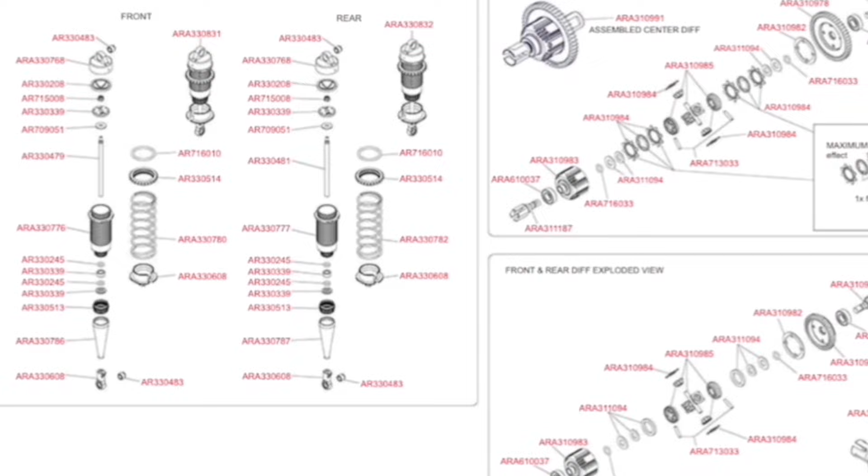About a year or a year and a half ago, Arrma came out with their EXB variants for their rigs, and these differentials had slip plates inside of them. I'll go into the details about the slip plates. But ultimately, in their latest rigs, the Extreme Kraton or the 6S Big Rock, they still use the EXB differentials. The only difference is they've removed the slip plates from the rear and front differentials, and came out with a kit. The center differential still uses the exact same center differential that you got with your EXB.

So this video is going to do a couple things for different people. If you're brand new to the hobby, this will be your first deep dive into understanding the differentials that came with your Kraton EXB Extreme or your 6S Big Rock - taking them apart and reinstalling them, I'll show you all of that. However, if you've got a V3, V4, or even a V5 and you're looking to upgrade to the best setup Arrma offers, the only thing my V4 hasn't done yet is switch my differentials to the new EXB variants. So that's what I'm doing today. Strap in, here we go.

What's going on everybody? This is the Arrma V4 Kraton 6S. I don't know if you remember from my last bash session, but I was actually experiencing some clicking in the rear differential.

I'm actually going to upgrade to an Arrma Kraton EXB diff. So I jumped onto Jenny RC's and picked up an entire diff housing. In my V4, the only differential that's going to be the EXB version is going to be my rear. The gear setup on the EXB differentials is not only tankier, the spiral cut is slightly different, so you need to make sure you swap out to the proper EXB spiral input gear.

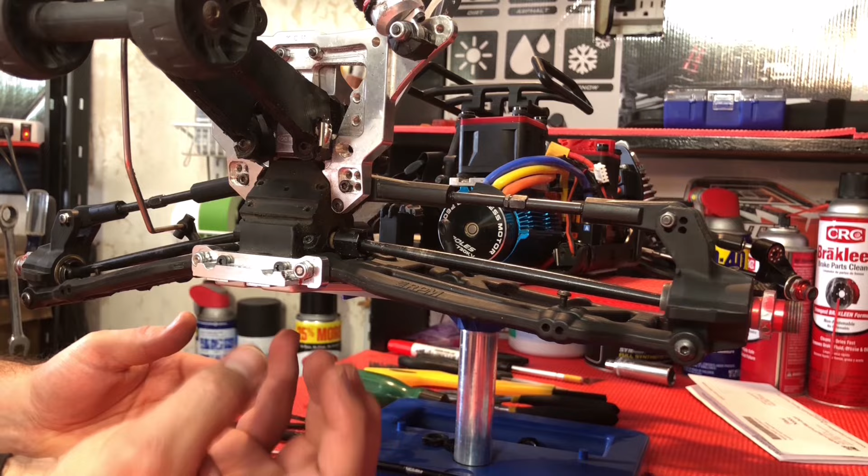Now that's removed, I went in and removed the four screws holding on my rear skid plate, popped out the pins for the shocks, folded those up, and I have these all tucked away with this rubber band. Pop this off and we can work directly with it here.

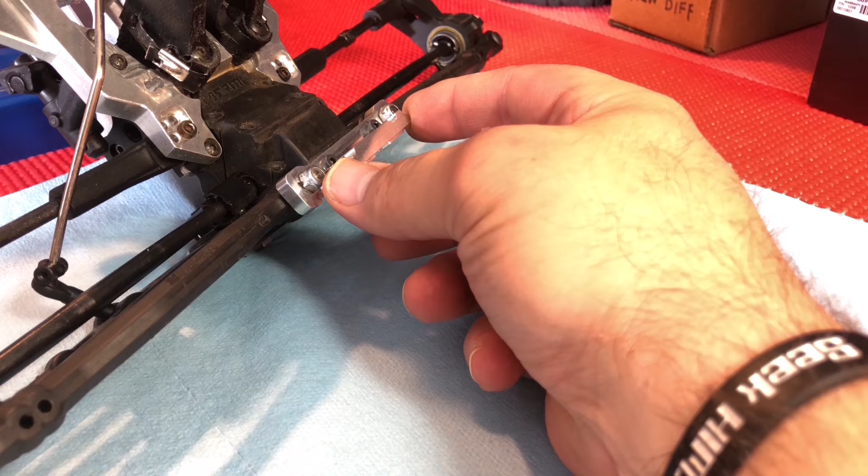You'll notice this is a beefier hinge kit than what you would normally see from M2C, and that's because I've incorporated a unique rear bumper, which is right here. This is actually the Mojave rear bumper. In my opinion, it's one of the best rear bumpers you can get for your Kraton and many of the other Arrma rigs. Highly recommend watching this video if you haven't checked it out yet.

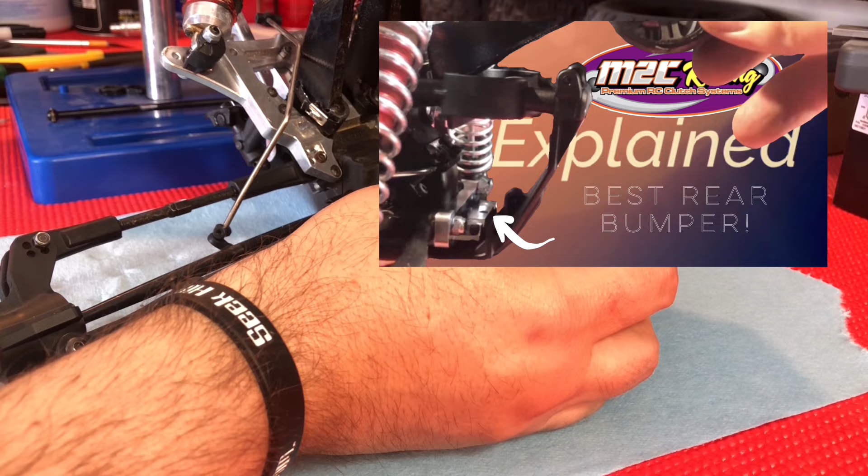There we go. You're going to want to make sure you put these shims back on with the new setup.

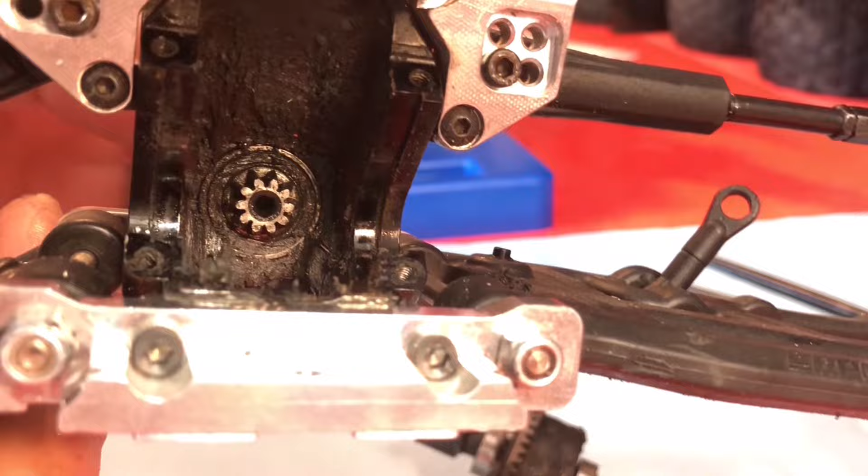Now to determine where the actual clicking came from, we could take a close look at the spiral input gear. It looks fine, but you see those two are really bad - the tips are gone off of that one, and that one, and that one. So that's probably where my skipping was happening.

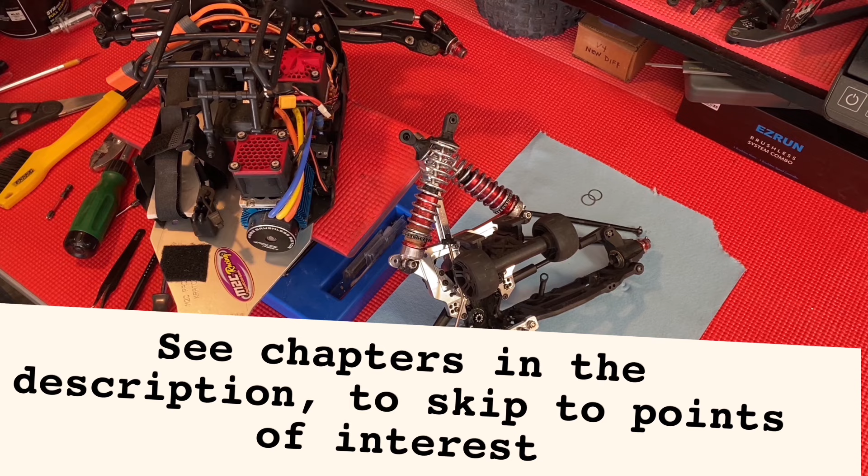We'll take a close look too at the difference between the V4 versus the EXB. Let's go ahead and set these aside for now, because we want to remove this M2C outdrive cup that's connected to the spiral input gear.

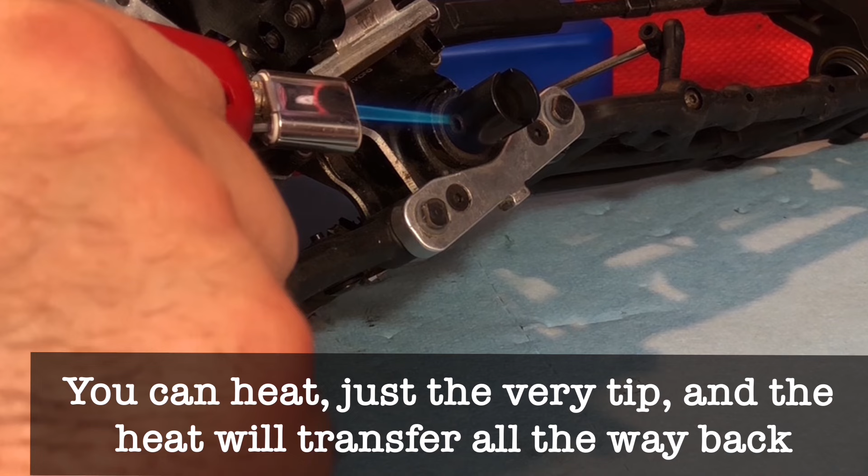Red Loctite was incorporated. Now if you have a composite bulkhead, throwing a flame at this might make you a little hesitant because you don't want to melt the bulkhead. I don't really have anything to worry about because I've got an aluminum bulkhead. Oh yeah, that's toasty. Super easy with a little bit of heat.

Now while I was cleaning this out, I found a shim that I put on the back side of this right here. Let's go ahead and get the EXB differential out.

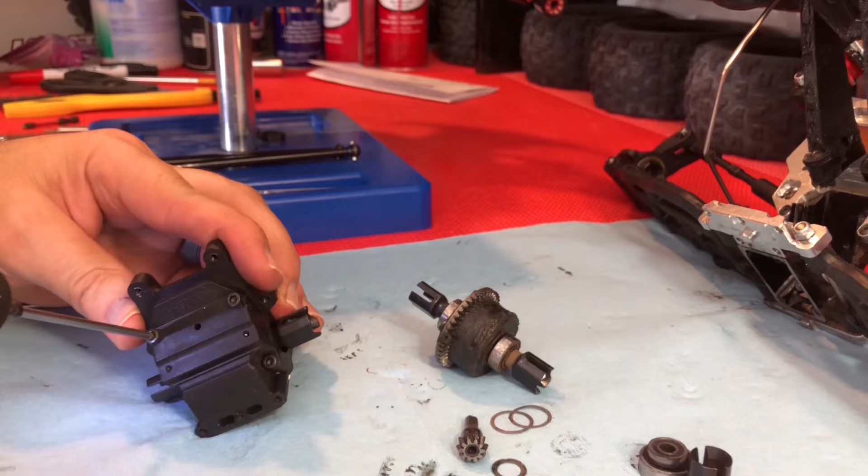From the factory, it comes with one shim. All right, so let's take a close look at the differences between the EXB rear diff and the V4.

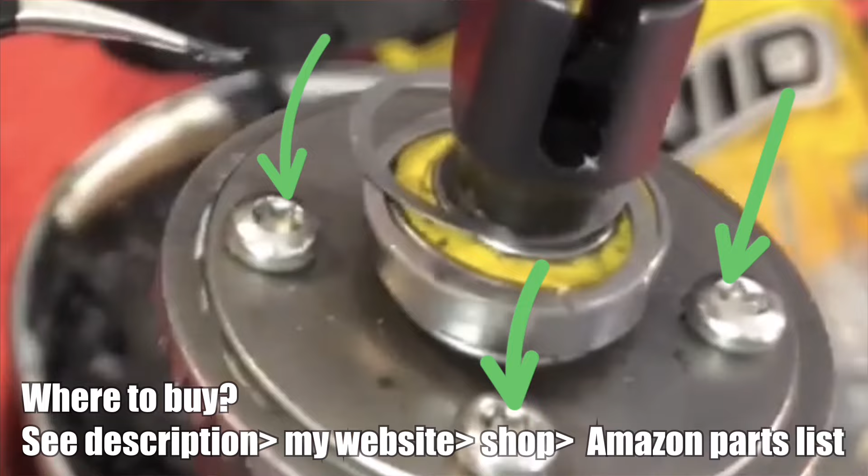First thing you notice is the V4 has screw-in bolts that protrude. I replaced all 4 of these with Torx heads because they were stripping all the time, driving me crazy. With the EXB, it looks like it uses the same size hex head, so hopefully those don't strip out too easily, but they are now flush, which is cool.

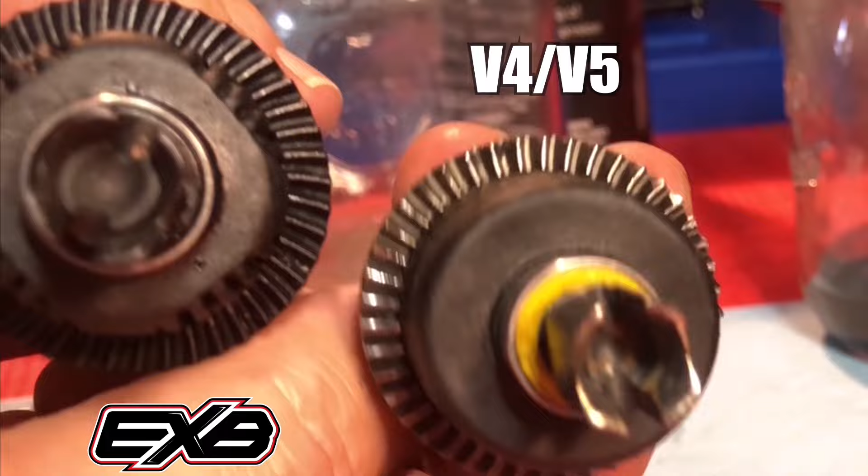The cup itself actually looks slightly smaller with the EXB, which is interesting. You can see that the teeth are actually longer by about 2 millimeters. You can also see a curvature to the EXB teeth, whereas the V4 variants are more straight. Looking at them from the side, the teeth on the EXB are a little bit meatier. They don't quite have such a fine tip, which lends to their more robust nature.

Also, you can see that the metal is different. This metal is actually a higher quality metal than the V4. You can see the mill lines in the EXB, which is another sign that this is a higher quality metal. And you can also tell they're just slightly taller.

All right, let's get these both taken apart and dropped into their jars.

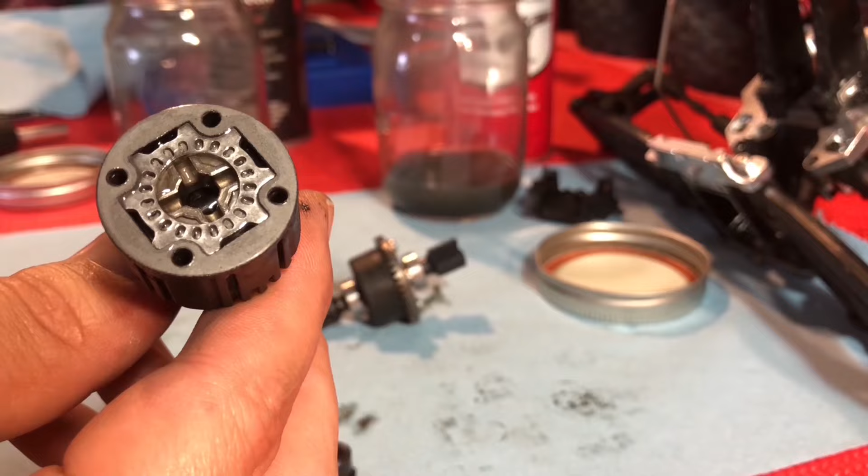Now, I believe when I picked this up, I bought the open differential, which, my first clue is that it's not, because I can see the slip plate on top. Let's get it open. The first thing we have is the gasket, which we want to be very careful not to damage, and I don't think I'm going to put the gasket into the solution.

Okay, we have 2 separate slip gears. If you look really closely at these, you can tell one side has a flat face and the other has a round edge. The rounded edge goes face down on the sun gear.

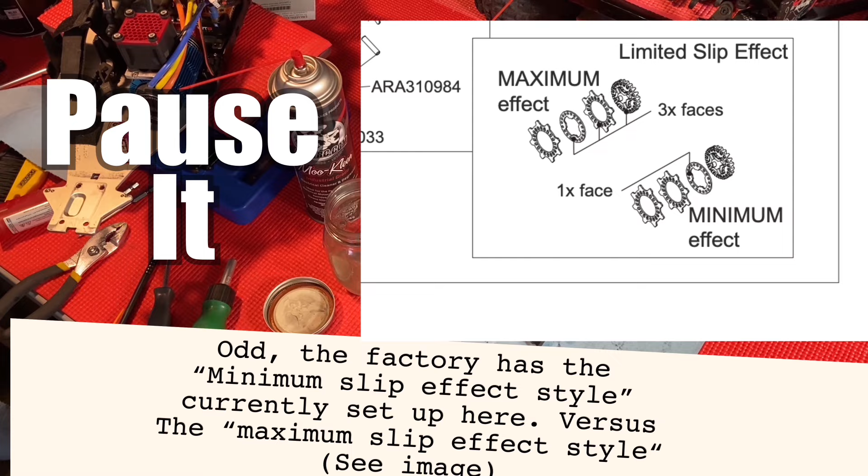Okay, now let's drop both of these into the solution. This is one of the main features that's better - that pin is way beefier in the EXB.

And that's pretty much everything. Pull this out. And then we've got our grommet. Now the grommet I'm not going to put in here because you don't want to do anything to deteriorate it or change its rubber quality, so we'll just dry that off.

Let's go ahead and remove this thing. Look at that, see how that looks? Pretty cool, we'll keep those into the new setup. They don't need to be put in there either.

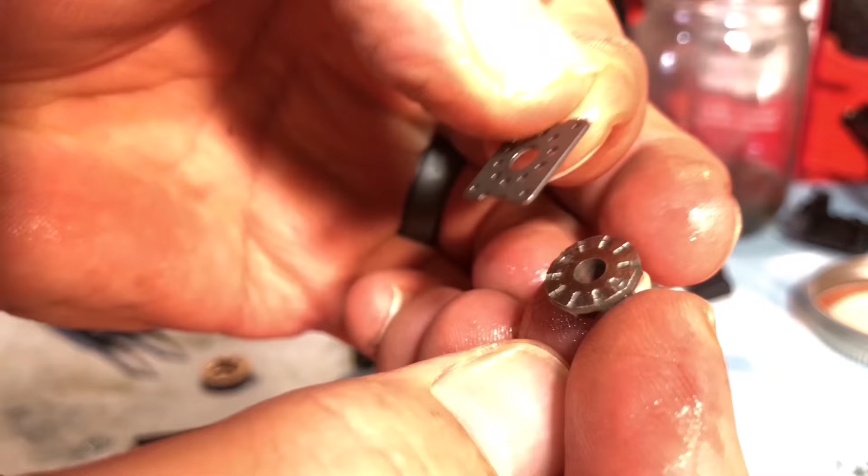All right, continuing on. The rounded edge goes up against the spider gear. We already know about this, so we can go ahead and separate everything out.

All right, let's see if we can't get this one out now. Sometimes getting a pair of needle nose pliers like these is easier. There we go, that in. And then just like the last one - oh, wait a second, this time it's in between them.

It went in this order and this facing. Let's go ahead and get the pin out. In order to get that out, we have to actually pop off the grub screw there. Set that aside, we can line that up and get that pin out.

When pulling this out, I didn't notice any washers or anything like that on either side. Now as far as on the inside goes, we have a big washer, a little washer, and our O-ring. I just want to point out, as far as the sun gear goes, that is way meatier - the teeth are larger, it's just tankier in all aspects.

Okay, so now let it also be noted that this is not an open diff. With the slip plates, it's got the slip plates. Without the slip plates, it's an open differential. You can actually incorporate some spacers instead of these plates so that you have an open diff.

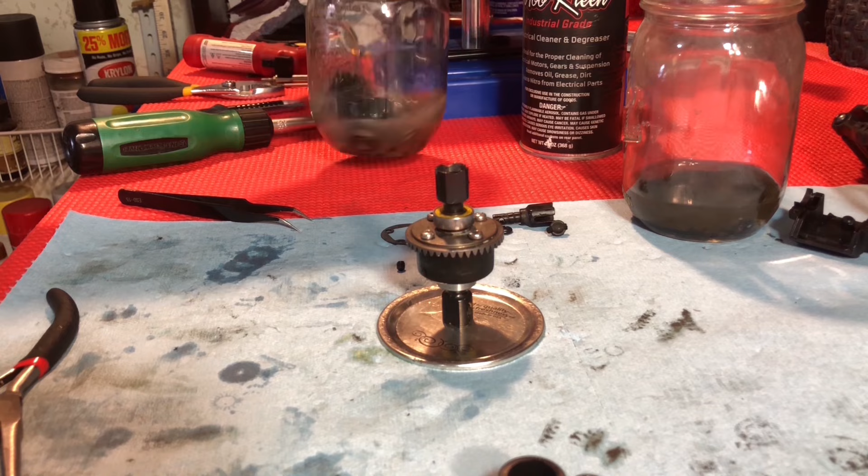Now let's take apart the V4 and put it in this jar. Try to hurry. Pretty goopy. All right, I am back and I finished cleaning up the V4 differential.

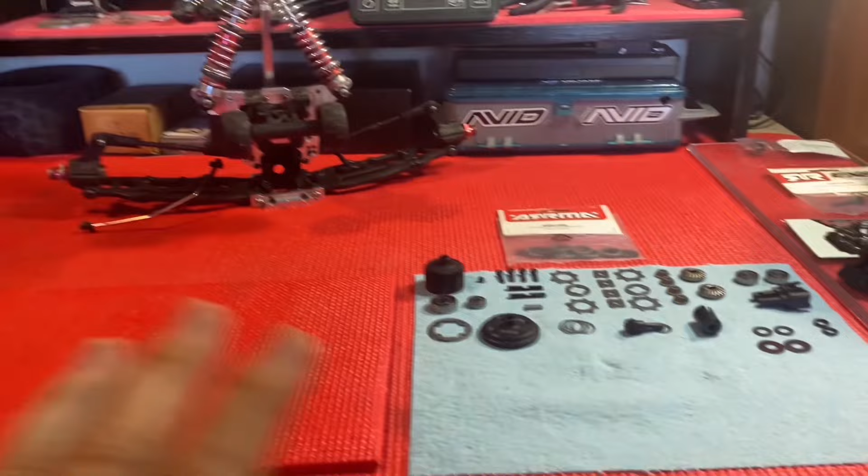I wanted to get into a little bit of detail about the value of switching the rear end over to the EXB differential. I've had the most problems with the rear end. Over time, if I strip something in the center, I'll switch it to an EXB differential. Same with the front. I love what I see when it comes to the EXB. That's what I'm showcasing today.

Before I jump into the installation and reassembly of the EXB differential, I wanted to talk about the new gears. They're beefier, tankier, made of a better metal. Arrma also incorporated this limited slip technology. I'd like to talk about that.

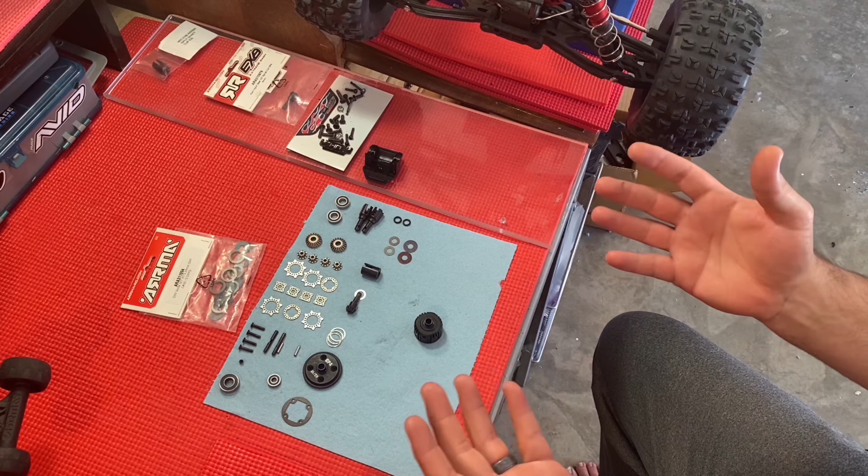You're going to find limited slip disc technology in your cars, larger trucks, real world situations, because there's an interesting thing that happens both at large and small scale that needs to be accommodated for. When you're ripping around on a track and this tire is on really solid road pavement with a ton of grip, while this side is on a slippery surface like sand, water, or oil, when you gun it, the side without traction ends up spinning way faster and getting way more power. You won't get as even power to grind out a fast rip. So what happens with a limited slip differential is it allows power to still be sent to the other side, not all of it driven to one side or the other. It basically gives that side back more power for more even traction to the rig.

So with that mentality, you'd think a limited slip differential would be better for all circumstances, right? Well, it's sort of hit or miss when it comes to RC cars. In real world, large scale vehicles, it's actually really important, especially in large scale off-roading, or even just vehicles trying to maintain the right traction and friction for driving on a road or icy road. You might see videos of somebody in a car where one tire is completely stuck and the other is just spinning, so they're stuck and can't move. If the stuck tire was getting more power sent to it based on a limited slip differential, it would be more likely to get out of its situation.

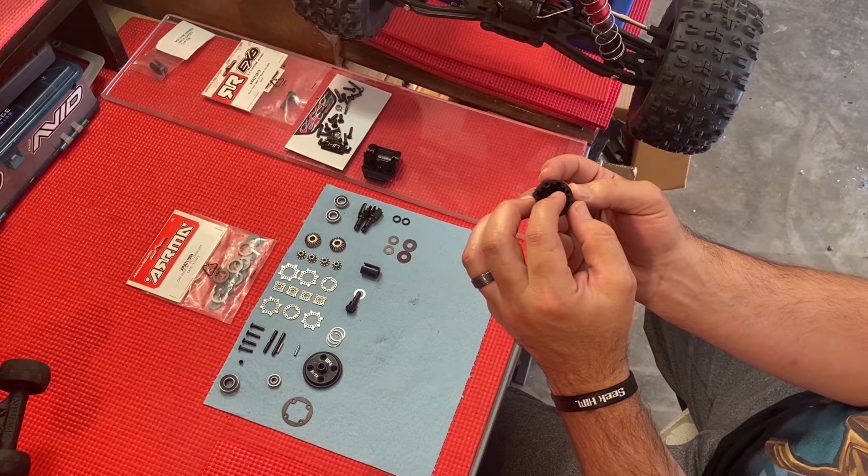Inside the cup of a large scale vehicle, the technology is actually different from how Arrma incorporates their limited slip action. Let's assume this is the inside of a differential for a 4x4 truck. They have a spring that sits between the spider gears, pushing outward and giving consistent pressure. Then they have slip plates inside on both sides with the planetary gears, and the pressure of that spring pushes and creates pressure. It squeezes the discs together, they lock in, and it provides power to the side that's spinning too fast. So it uses a pressure system for the technology.

Arrma didn't put any sort of spring in here to provide the same type of technology. Instead, they incorporated little holes into the actual slip discs that create more drag. So it actually uses the differential fluid as part of its technology to run. The downside or drawback to this is that when you're using the diff fluid itself as a component for engaging the slip plates, for traction to be sent more to one side or the other, you're using a component that already exists.

So many people in the RC industry have found that whenever running limited slip differentials, it just feels way different. That's the simplest way to put it. And there's less consistency with the performance when turning and doing different things. It's not necessarily a bad thing, it still works to some degree, it just doesn't work as well.

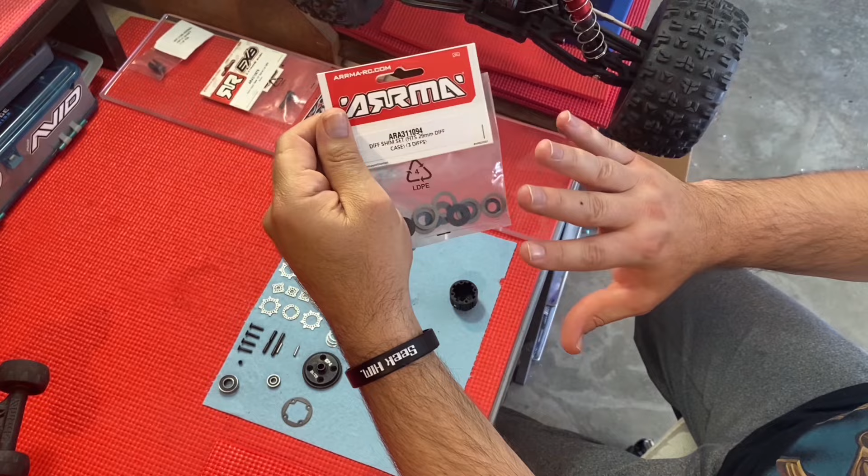There was a lot of hangups in the beginning when Arrma came out with this rear differential slip disc stuff. You don't want to just throw together your own shims, which a lot of people were doing, and then they were having problems. Arrma finally came out with a shim kit that is the exact thickness, addressing the issues they were having from the beginning with the EXB. I'll probably still open these up and mess around with the oils. At the end of the day, I might even make all three differentials open because I'm just not digging the way it's cornering or the way it feels.

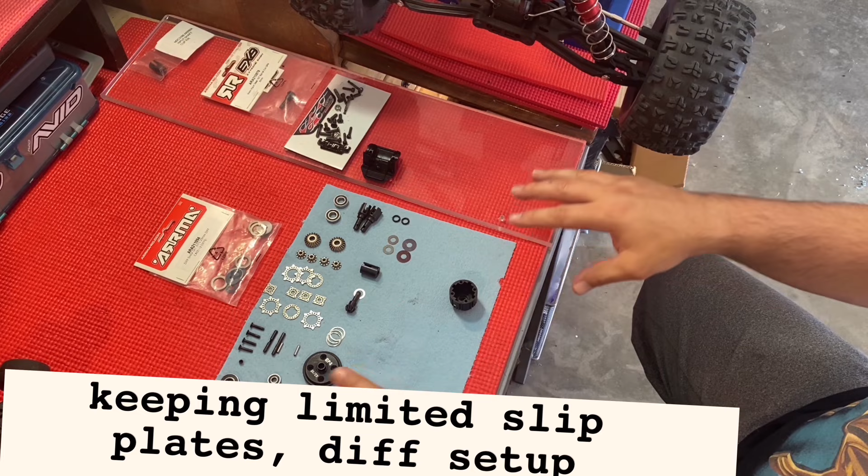So with all that said, let's get into the weeds and show exactly how to put this thing back together. I'm going to throw this together in a dry fashion so you can see exactly how to reassemble this if you're incorporating the slip plates.

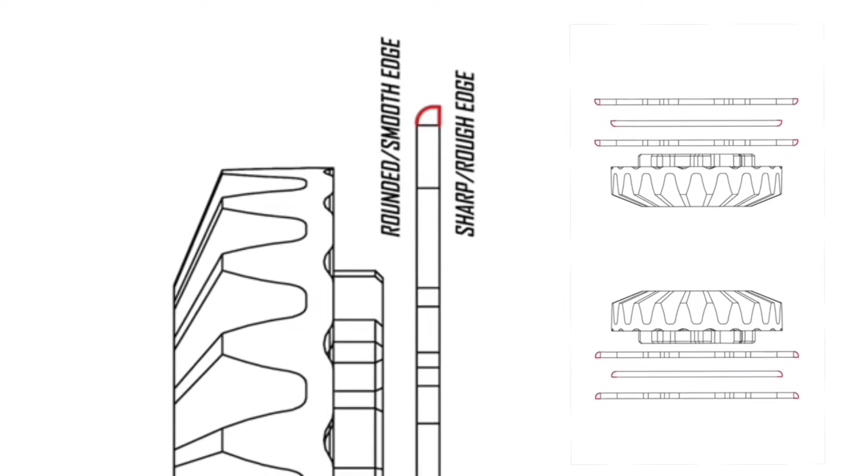There are two ways to load the slip plates. This fashion incorporates less slip than if you were to put this down first: the star gear, then the circular gear, then another star gear like this. Remember, the rounded edge faces toward the sun gear.

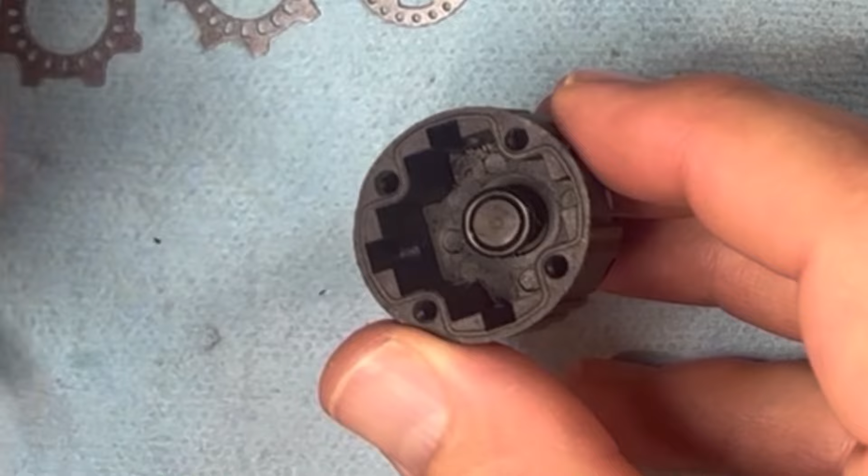So let's set this up with the slip plates. First you grab one of the outdrive cups and the bearing, pop the bearing on, push this up through. Again, I'm doing this dry. We take an O-ring and gently push it down into position. Normally I'd put some of Cow RC's Udder Butter here, but for now I'll just set this aside since it's a dry run.

Then the larger of the two shims, then the smaller. Then we slide in our pin, drop this in. Before the sun gear, we're going with maximum slip, which means I'll put this in first, rounded edge up. And we'll go with this rounded edge up again.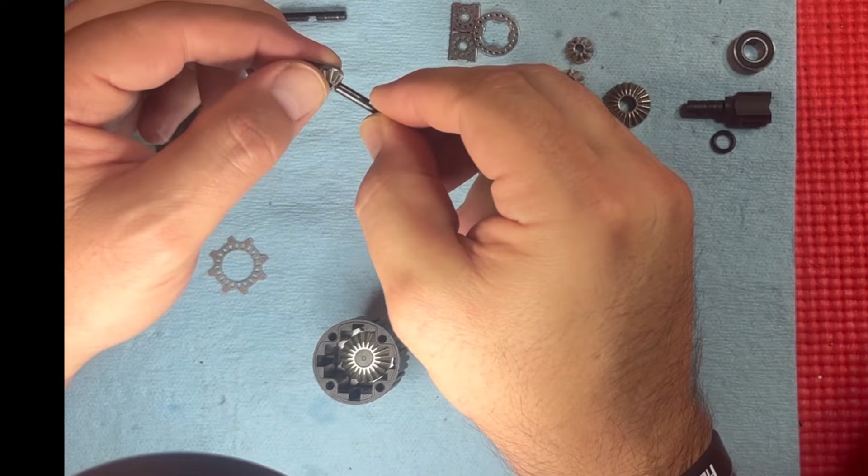Now our sun gear drops in. Next we assemble the spider gears with the shafts. The rounded edge touches the face of these spider gears. I need to rotate it so the notch is at the top facing upward. Now we assemble this one, rounded edge in. Everything should rotate, okay.

Now again, we're doing maximum slip: sun gear, then rounded edge down on the first one, rounded edge down on this, rounded edge down here. Now that this is assembled all the way dry, you'll notice it sits perfectly flush with the top.

The reason I wanted to do this dry is to show you how the slip plates interact with the differential fluid. If you look closely, you can see the holes. When you have a large star plate, then the small circular plate, then the large star plate, with interaction between all three of those holes, you get the most resistance from the oil.

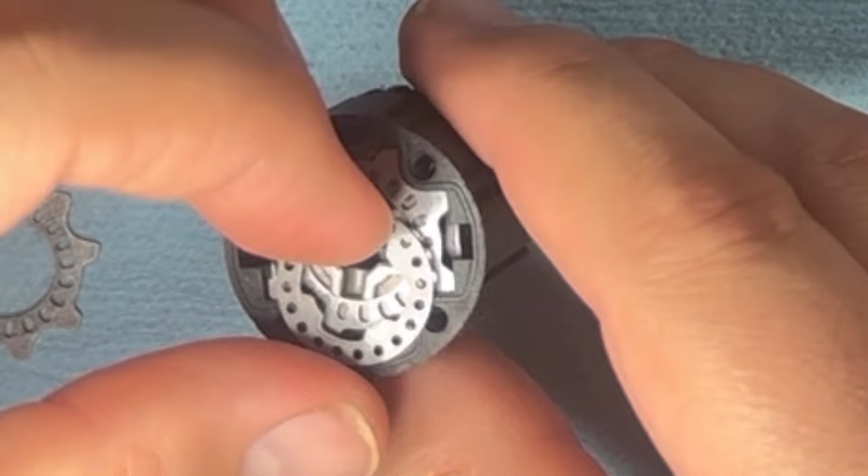Whereas if we take these out and do the limited slip variant, putting this down first then both of these, these two plates on top end up staying static the exact same. So you're really only getting interaction between two holes instead of three as they cross pattern with each other—less impactful than if you did every other.

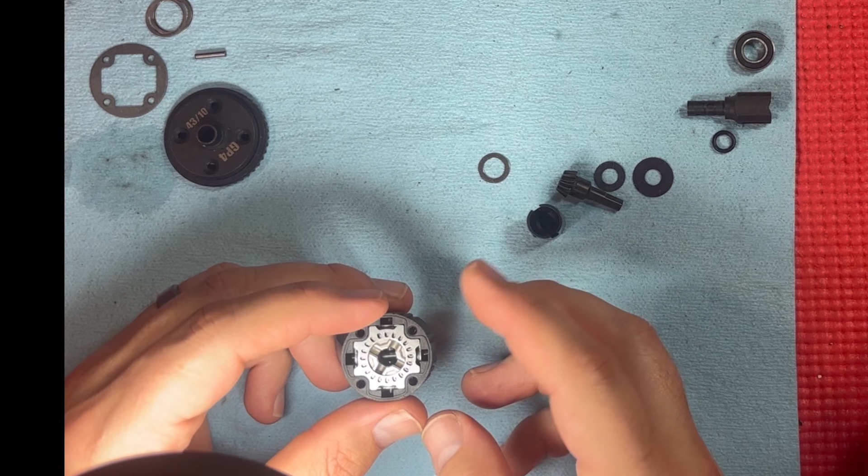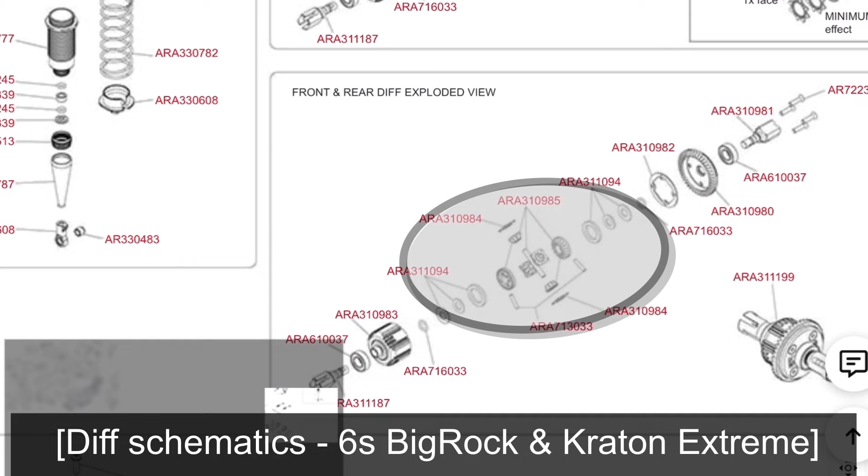Again, people's experience with slip plates is sort of hit or miss. You can tell that Arrma is actually switching both the rear and front differential to open diffs, doing away with these slip plates—taking a step backward and not presupposing that slip plates are the solution for front, center, and rear. Now they'll only have slip plates in the center and open diffs on the rear and front. Now I'm going to take it apart and put it back together with our shim kit.

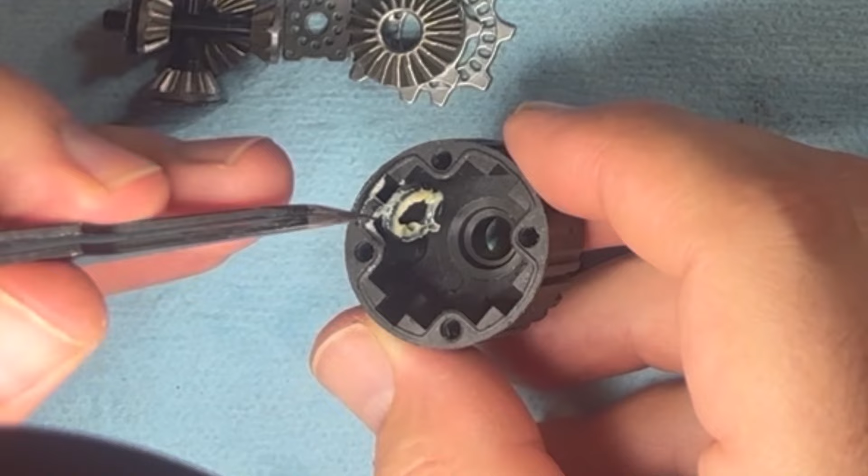Now I'm going to use the udder butter. In the past I would use green slime. I've got to say, if it's anywhere near as crazy good as all the other Cow RC products, this stuff's going to blow my mind. I'm going to take this, half of this, and just try to distribute the goo on this ring.

Large one, then the small one.

You'll notice the inside of this kit, really, when you buy the kit, you're buying a lot of extras. The only shim that you really need are these big, thick silver ones. You just need 2 of these fat ones. Now, if you look, 3 of these equals 1 of these, thickness-wise.

All right, let's get in our pin. Next, drop this in first. It drops all the way down to the bottom. Then we're dropping in our sun gear.

Flush. At this point, we want to put in our differential fluid, okay? Now for me, I'm gonna run 20K in the rear. Stock from the manufacturer, it comes with 10K. This is a little bit more thick than the stock variant.

Let that sit and settle for a second. I'm gonna spin it just a bit. Make sure that kind of seeps down all as low as it can go. Now we already know we put these together properly from the last one.

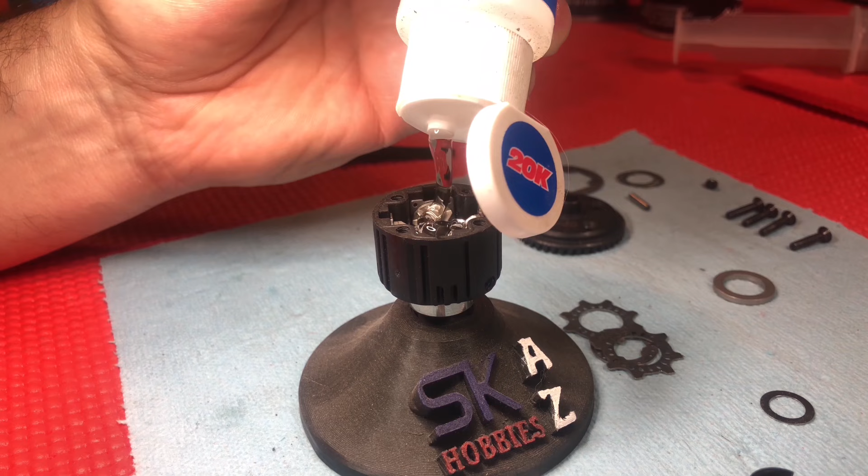Let that sink all the way down. We'll spin it, push it down. And we'll take the second one of these, set that in. That is how you put back together an open differential.

Now you'll notice that there's still a little bit of room for some fluid. So let's set this aside and let's put together - we're gonna take our O-ring and then some of our udder butter that we still have left over from Cow RC. Push that in.

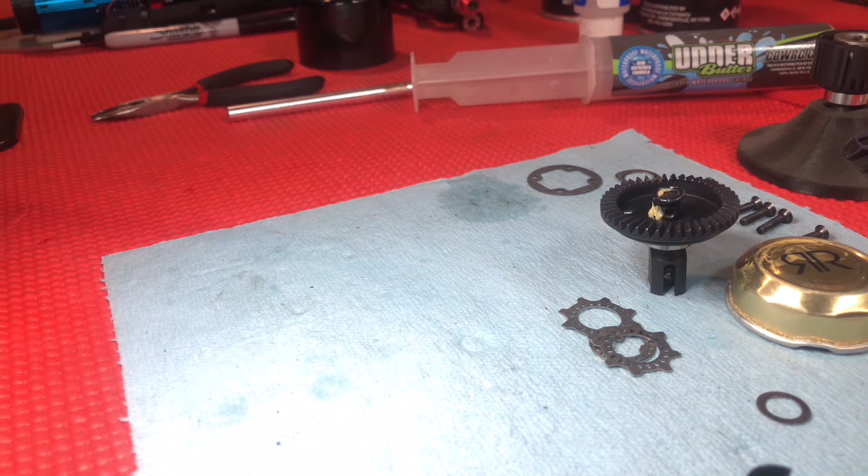Okay, so we're just gonna stick this in there and rotate so that this stuff gets down in there. Large one first. Small one next.

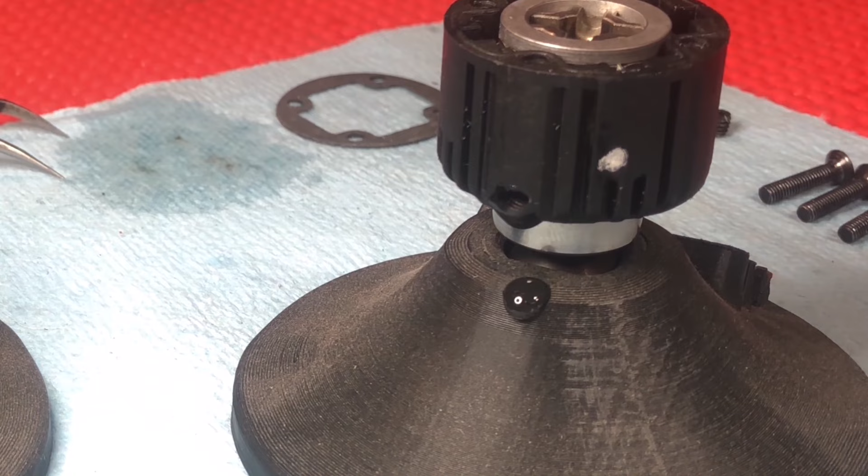We're gonna take our pin. Oh, almost forgot, look what I have leaking out. Fortunately, I haven't lost a lot of it. Let's get that back in there.

You do want to make sure that you can't see it, a lip there. You don't want to see that lip. Now that lip's gone. Let's top this off. This face right here, we want to keep as dry as possible. If you notice any of the differential fluid getting up on this ridge, you want to try to dry it.

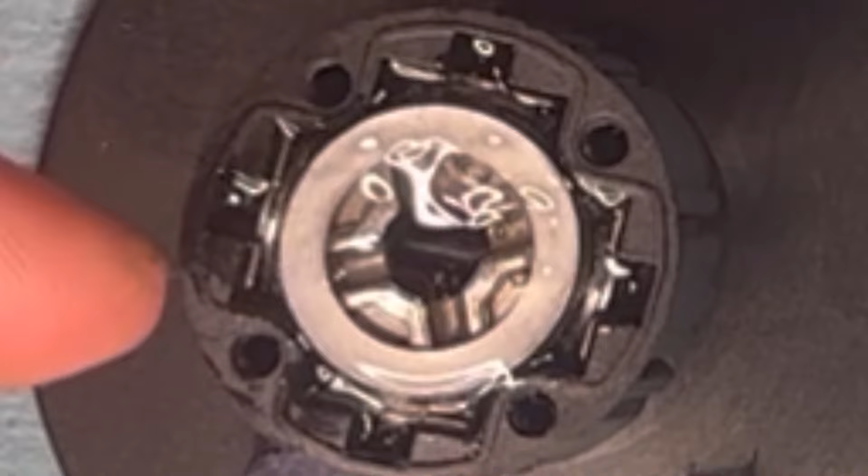Just pushing it down and making sure that I'm happy with the amount of fluid that I see in these sections here on the edges. 1, 2, 3, 4. Now we're going to take the gasket, set this in here.

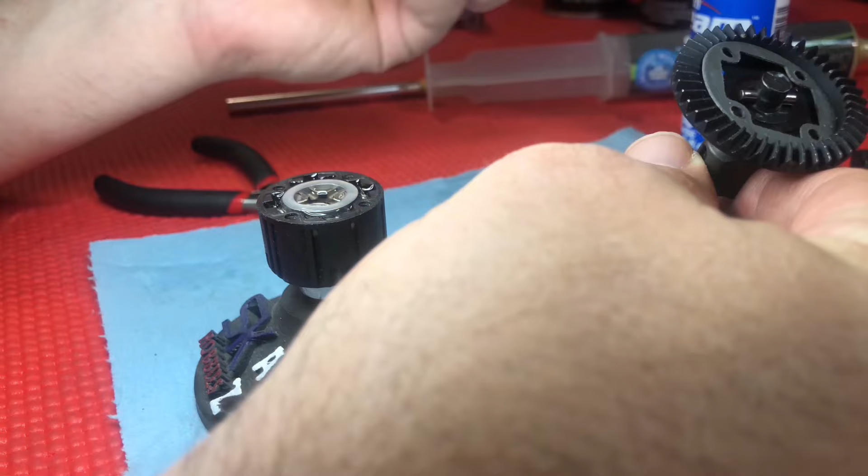We'll line up the holes. I'm going to rotate this so that the cross section of the X matches the holes. Then I'm going to rotate this so that the cross section matches the holes.

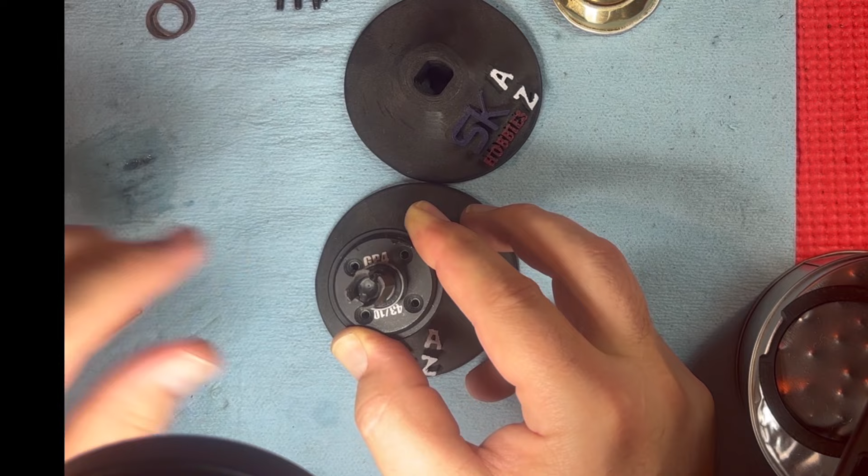Notice how I use the tip of my needle nose to kind of line up that hole and make sure it's pressed all the way down. Now I'm going to check to see if there's any leakage. And I'll just spin it at 360. All right, let's screw these down.

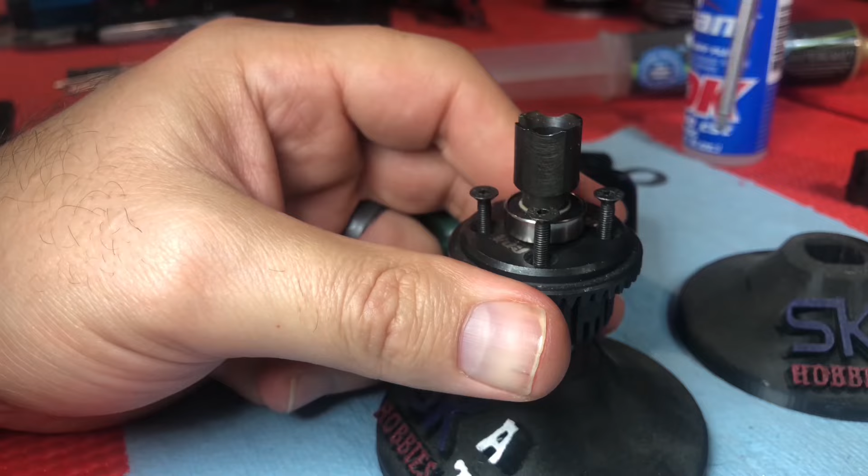Okay, now if you use a drill, you are going to be drilling into plastic, so you must be very careful and not go all the way down, or else you will strip out the hole. Also, you don't want to go too fast with a drill, because you will heat the plastic down there, which will lead to stripping as well.

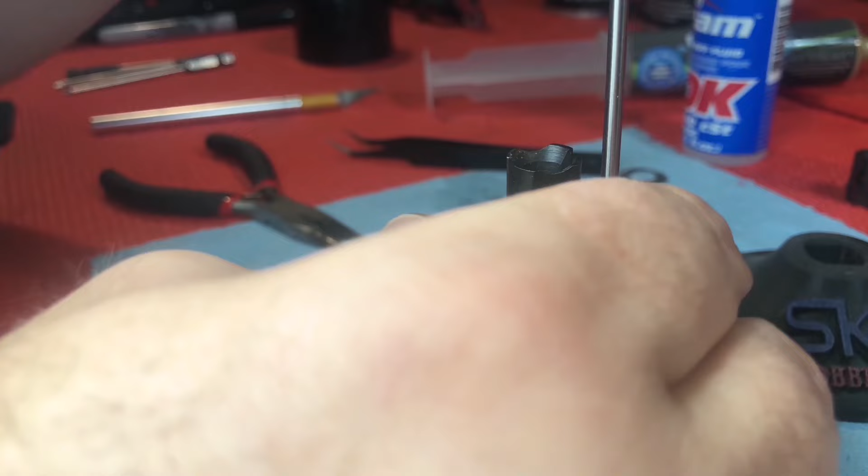And then go cross pattern over to the other one. And you'll know when it starts to get tight, and you don't need to crank it a whole lot of times after that, because you don't want to, again, strip the plastic down below.

Twist it. You shouldn't feel any binding or snagging of any kind. There shouldn't be any slop, very little. So now I officially have an EXB open differential in the rear.

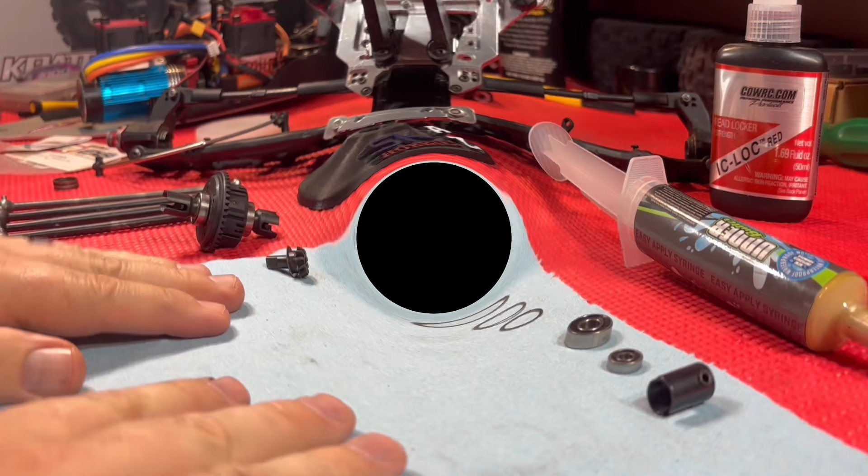All right, well, let's get this thing reinstalled. Okay, everybody, let's get this thing put back together. I want to do this rather quickly, and I'm probably going to fast forward through a lot of it because you already see me pull it apart. So a lot of those things are just going to be the same except in reverse, but there are a few key details that I do want to bring up. Maybe we'll just get this out of the way right now.

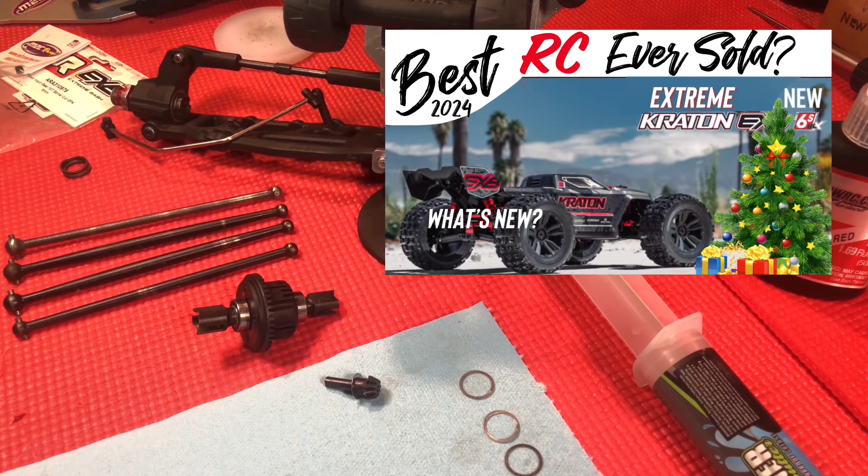I do want to point out that I have a shim here that is on the backside of this EXB spiral input gear. This shim did not come stock, but I do like to put it on. It pushes the mesh just a hair closer when it comes to putting this together.

I'm going to be using the Udder Butter to go around the outside of this, filling up the chamber of the bulkhead with the Udder Butter. Now this is an awesome product from Cow RC, it's more akin to a marine grease that is water resistant. Before I was using this stuff right here, which is a full synthetic grease. This stuff works fine as well, but it's not as water resistant as this new product that I've gotten from Cow RC. So I'm really excited about that.

Another thing you're gonna see me using here, I do have their red Loctite and blue Loctite, high quality. The dispensing system on it is top notch. The way it seals up is top notch. And also there's just a ton of it, so once you buy this it'll last literally forever.

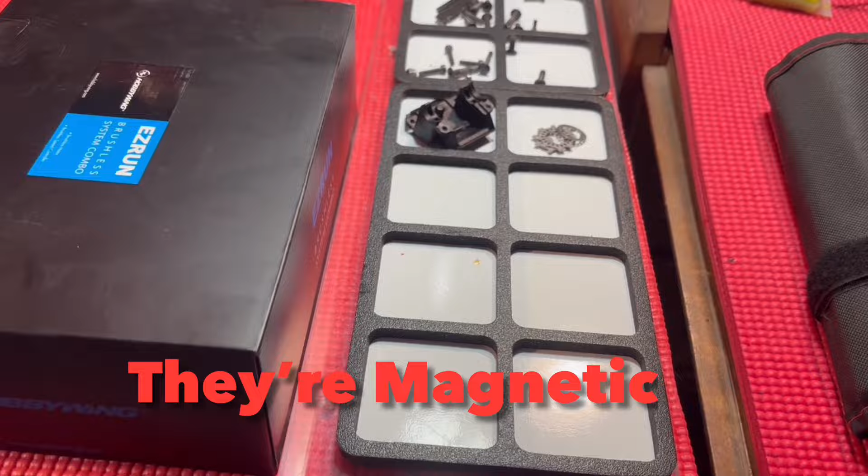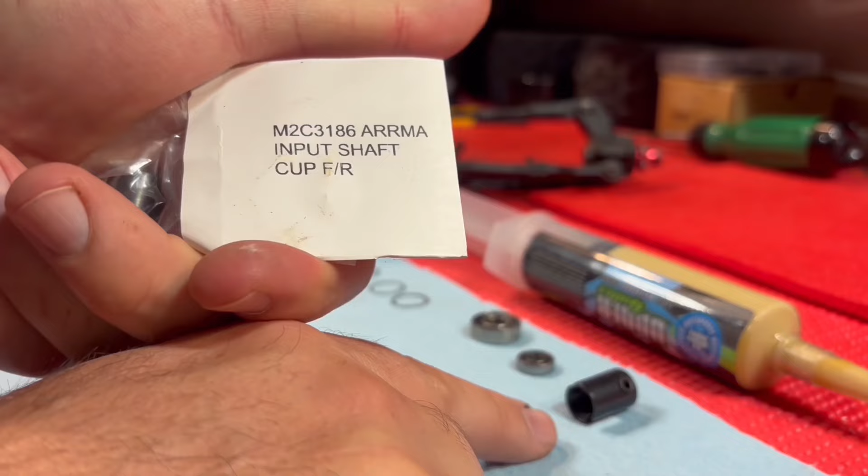So amazing products. This piece right here, M2C 3186, this is a higher quality metal than you're gonna find from Arrma. So I'll be using this one on the outdrive cup for the central drive shaft.

And then if you're gonna be switching over to an EXB differential, you do want to make sure that you pick up ARA 310979. Keep that in mind.

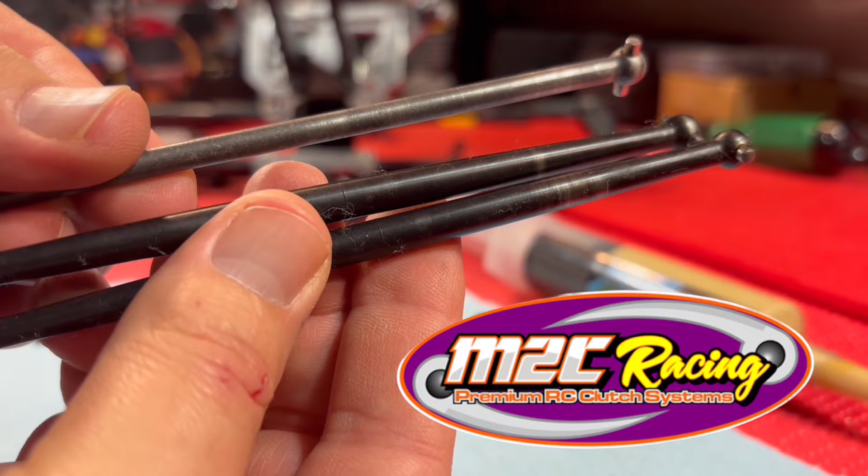And then the other thing I wanted to bring up is I am going to be running M2C's drive shafts. These things are absolutely amazing. I mean, if you want to look at the difference between the drive shafts, you can see the metal quality from M2C is a lot higher. And you can see the thickness of these drive shafts compared to the stock drive shafts. There's just no comparison. All right, so let's just get this thing back together.

My previous setup, I ran 2 of these shims. It's not necessarily gonna be a one-size-fits-all situation. When it comes to these shims that go on the left side of the differential, I have a stack of shims, and you can imagine that these all have different thicknesses. There's one silver one in there and a black one in there that literally is as thick as 3 of the other ones. So depending on what shim you have is also going to make a difference.

So my ultimate point that I'm trying to get at, when you push this thing in there, you're going to want to determine how much slop there is. If there is a wiggle back and forth, you might put 1 in. If there's a lot of wiggle, you might put 2 in. Maybe this thing just fits in there super tight and there's no slop at all. We'll find out. So here we go.

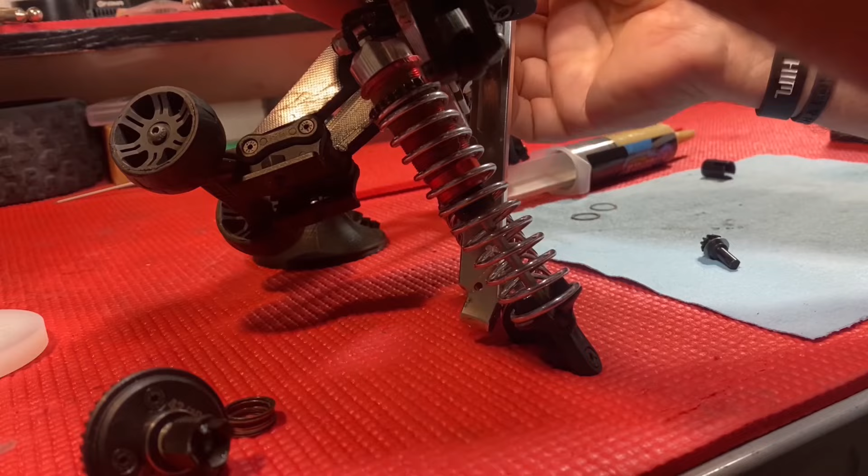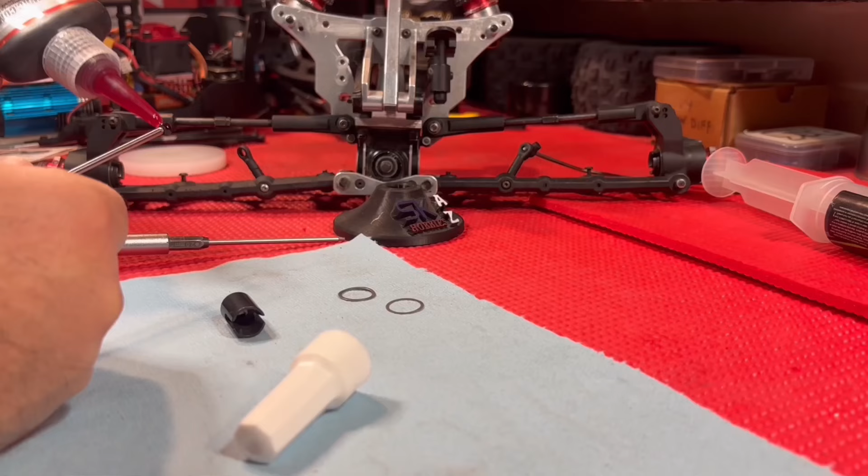Spiral input gear. Put red Loctite on it. Grub screw, you can tell it's in the right spot. All right, I know that it's squeezed together as tight as it can go.

All right, now we're gonna be using the Cow RC. I really love the dispensing system on this Cow RC product, how he put it inside of a syringe, I guess is what you call it.

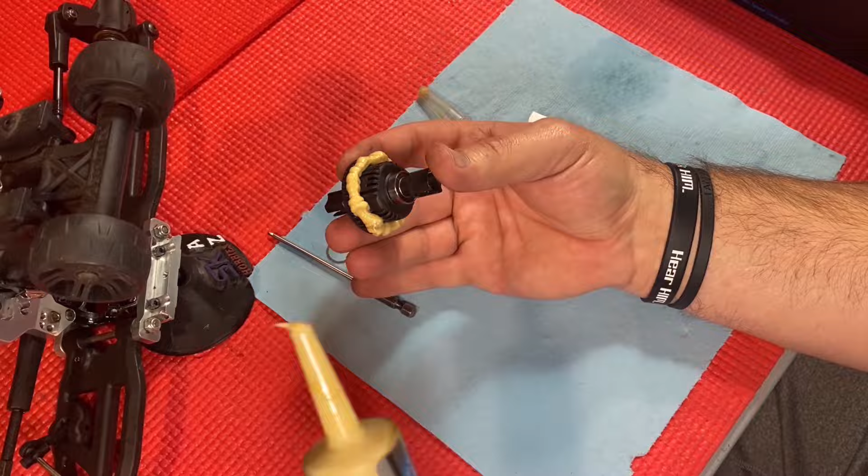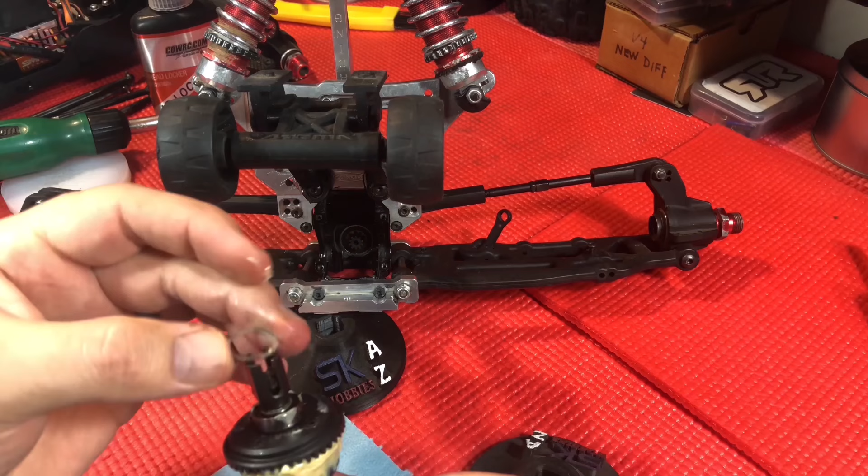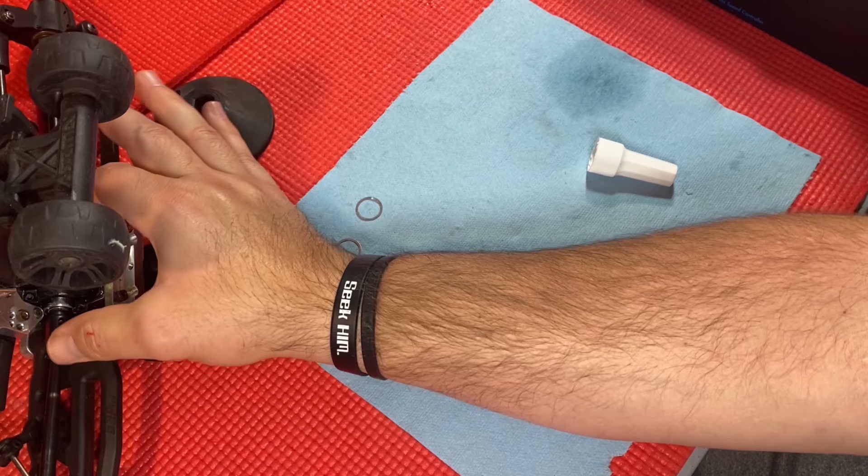Notice I was able to get it in with 1 shim. I'm not sensing any back and forth. Now I still use a plastic bulkhead cover, basically because I didn't feel like spending the money on a metal version. Right there, there's a little lip that catches sometimes. So there's 4 button head screws. Short screws go on the top, long screws go on the bottom. Should be good. All right, we can take this.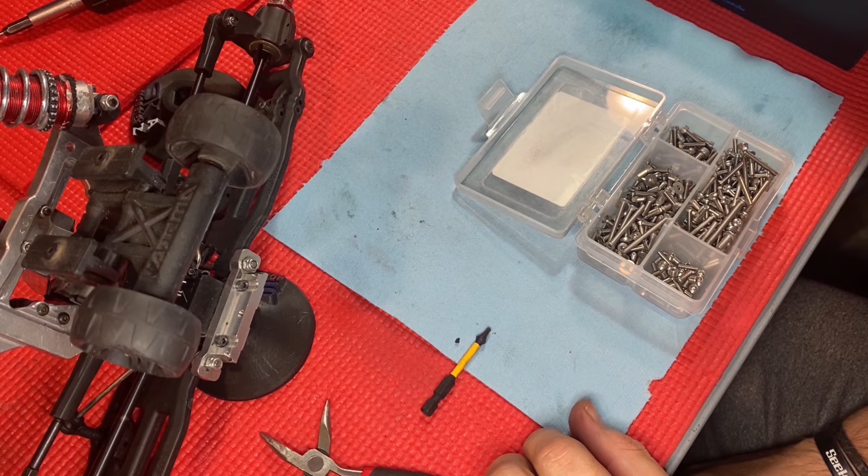All right, got those pieces on, everything tightened down. The question is, do you want this to be able to slide back and forth? So I just checked my rig from stock. You can move the bar back and forth slightly. So this can move, barely.

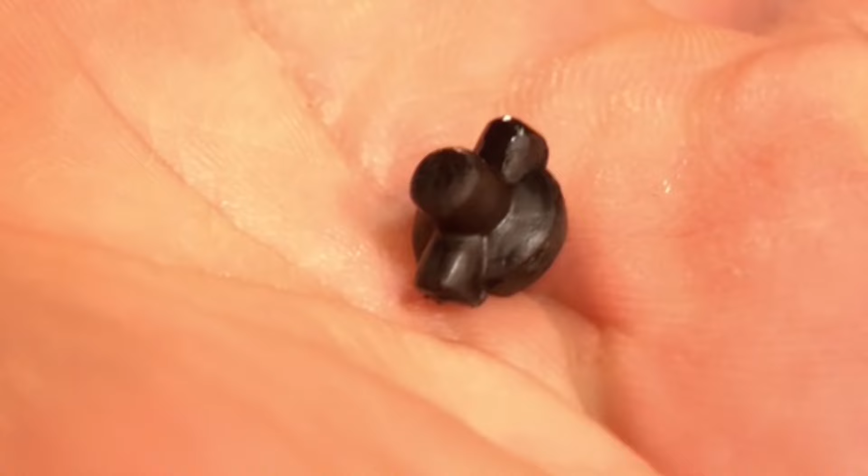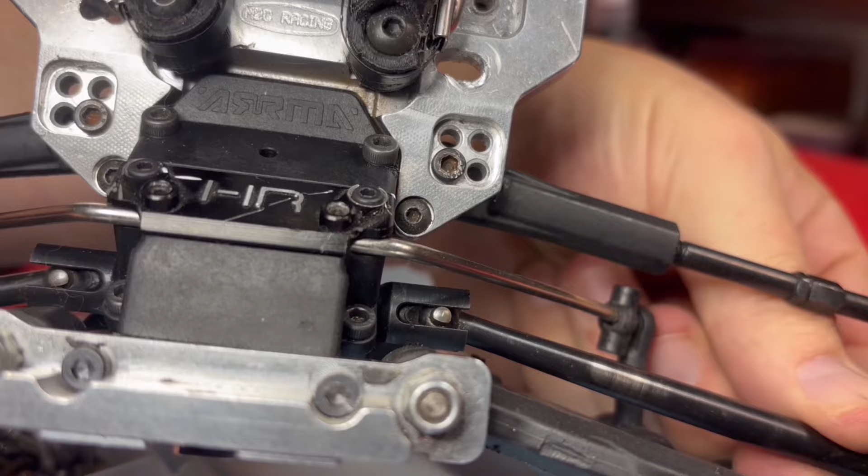One thing I think is interesting and worth pointing out, I'm trying to move this back and forth and I'm not getting any play. So these little grommets are put in there because what they do is prevent a shock impact from going in sideways on the differential gears and breaking your pin or planetary gear, or jacking up your internals on the differential. That's on both sides, none at all. Arrma doesn't ship their new rigs with it.

So, all right, the rear end is put back together. Now we just gotta attach it to the rig. Okay, a couple of things when putting this back on. Make sure you put your dog bone in first, just set that down. Lock it into place right here. Make sure that you've got your gasket, if you're gonna use it, on.

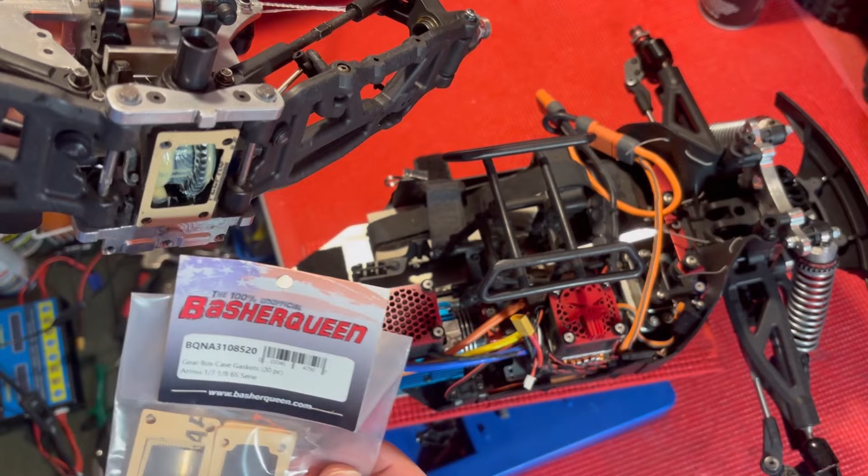You can pick these gaskets up from eBay through BasherQueen. This bit is a pack of 20. It's nice having these gaskets because it helps prevent any sort of water or other things getting up into your differential.

Center brace down first. That right there locks up into place. Now, when it comes to this bumper skid plate, there's a video right here where you can watch all the details on this install. This is a really awesome setup. I'm not going to go into all the details as to why, so watch the video if you want to.

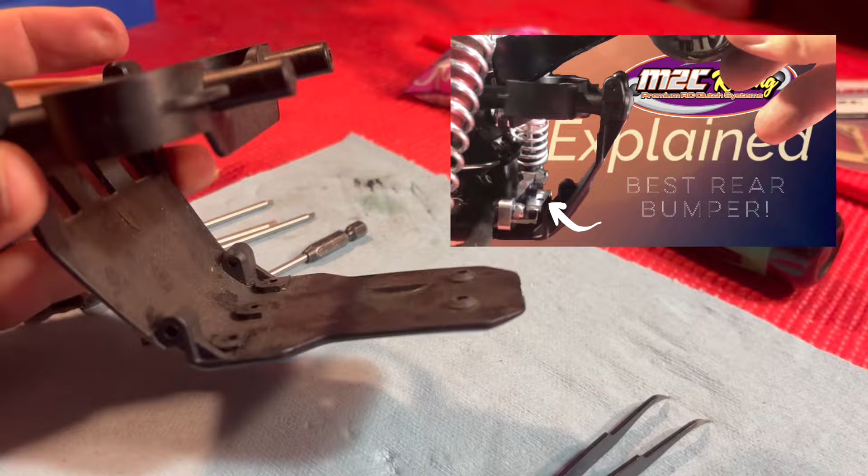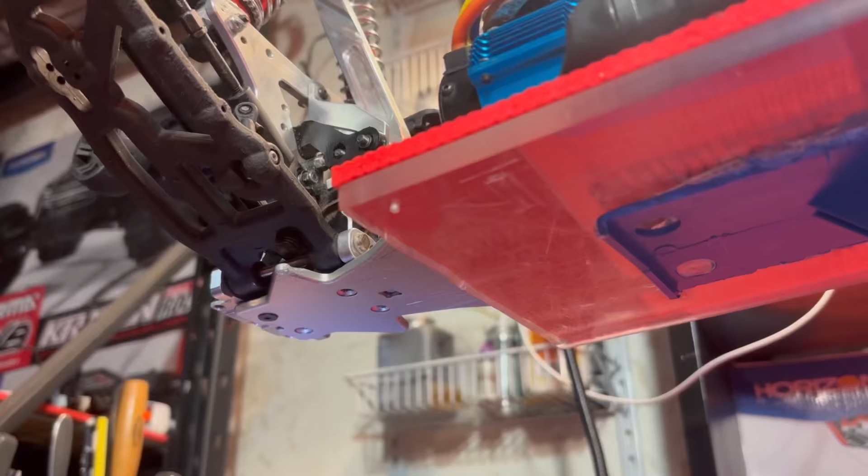We're going to put these two in right here first, right away, with a shorter screw. These two, which are longer, are going to go in here because of the thickness of the skid plate. And this one, which is just about 2 millimeters shorter, we have two of these. They're going to go in first. Now we've got these three.

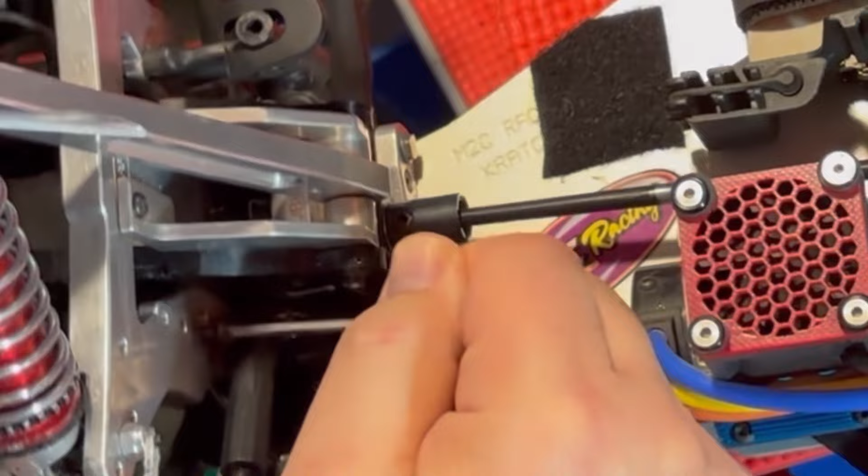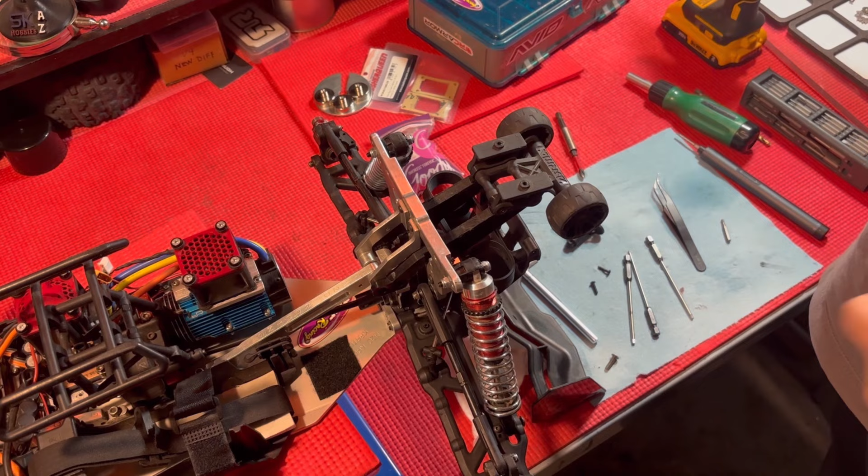All right, and then these two screws right here tap into the Mojave wing mount support piece. Not easy to get to these two screws, so I'm just going to use an Allen wrench the old classic way. Not ideal, but whatever. All right, and then last but not least, the old wing mount.

Okay, well there you have it. Rear reinstalled, set up with a new EXB differential, and that completes this operation.

All right, well that wraps up this video. I know this was a long video, so hopefully you jumped down to the description and were able to skip around to just the sections you were interested in. This covered everything you need to know about the latest differentials from Arrma, including the differentials that are going to be in the new KRATON EXB and the 6S Big Rock. Hopefully it was insightful and helpful for you.